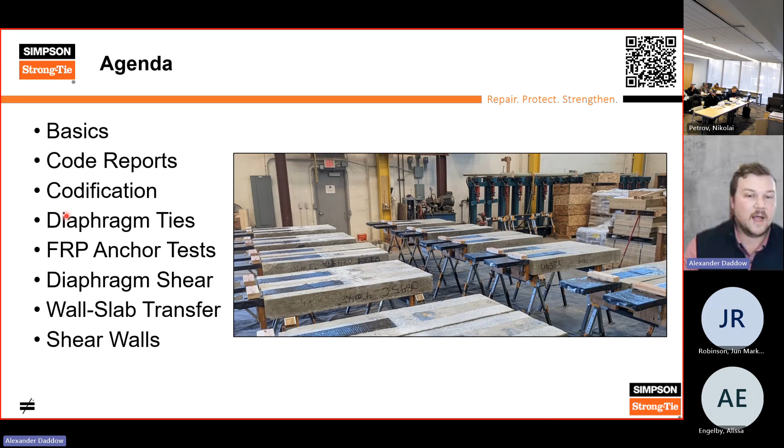Okay, no, that's good to know. I'll try and hit the button a little bit early. But yeah, today we're going to do a little bit of basics, importance of code reports, where we are with FRP, getting into the code, and then really dive into testing and applications after that.

So I like to start very, very basic. What is FRP? Because it's an acronym and some people don't even know the acronym. FR is your fiber reinforcement, and for buildings that's either e-glass or carbon, which provides the strength and stiffness to the system. And then P is your polymer resin, which is almost always epoxy for buildings, and that makes the fibers composite with whatever substrate you're applying it to, providing shear transfer and load transfer and making this externally bonded reinforcement system function correctly.

So I'm only going to talk about FRP today. I do work with another system, FRCM, which is a carbon fiber grid and cementitious matrix. It has very similar applications to FRP, but it goes onto rough surfaces a lot easier than FRP. Basically what I generally tell people is if it's concrete, block or brick and it needs additional strength or repair, you can call me and I'll help you through the whole process. We do a little bit of work on large members of wood, like glulam beams and mass timber, where FRP can help. It's just less common, so I don't talk about it too much. But that's the basics on FRP, at least on a very granular level.

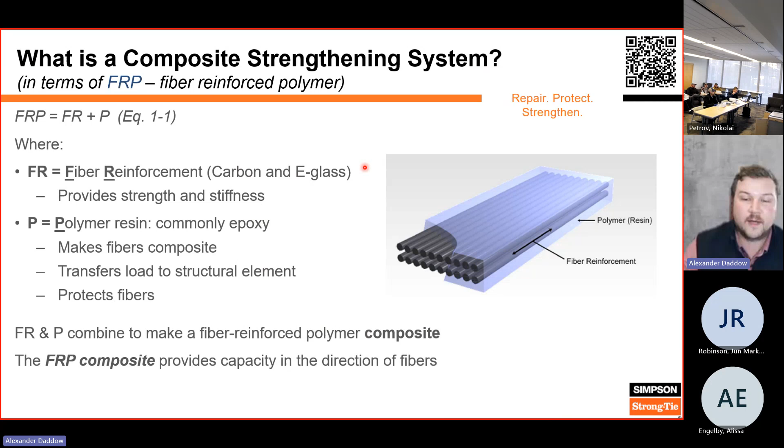Similar if you have shear, we're going to apply the FRP in what we'd call a U-wrap, essentially going down one side of the beam, around the bottom, and back up. So very similar to a stirrup. If that stirrup needed 135-degree bar bends, we would use an FRP anchor, drill that into the substrate, and

that'll anchor it off and be very similar performance. And if we needed to make a closed tie and your slab was actually in the way, we would use an FRP through anchor again to drill up through the slab and close that loop. That way we can get closed ties. So that's for the beam.

We can do similar things for slabs. Slabs, we generally only address flexural loads. Shear for slabs is not well studied yet, so I don't recommend it with FRP at this time.

And then for columns, at least for the gravity case, one of the most common applications of FRP entirely is a confining wrap, which is what we're seeing here, where we wrap horizontally all the way around, just like your closed ties. And we're picking up that actual cover area, so you get a little bit of benefit from just having more effective concrete, and then the FRP itself is confining the concrete to bring its compressive strength up.

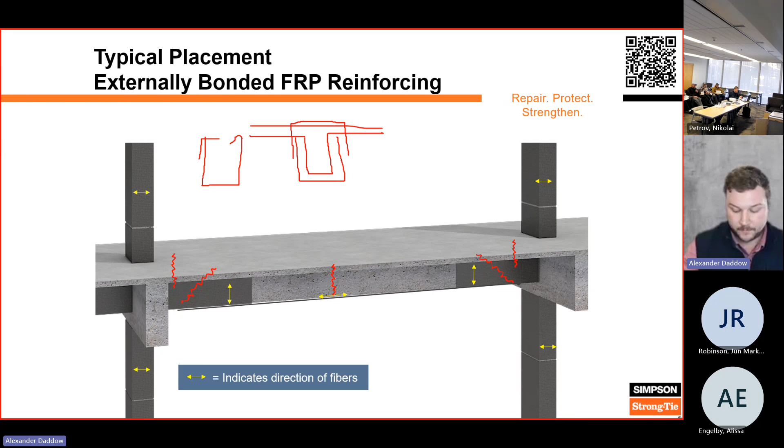How does FRP get through things? I kind of buried the lead a little bit, but we use FRP anchors to basically close that tie, and it is tension-only reinforcement. So when we have a through anchor like this one here, we're basically grabbing this strip of fabric in its parallel direction and transferring that tension through the element. So we're not depending on a through-type anchor, just tying things together.

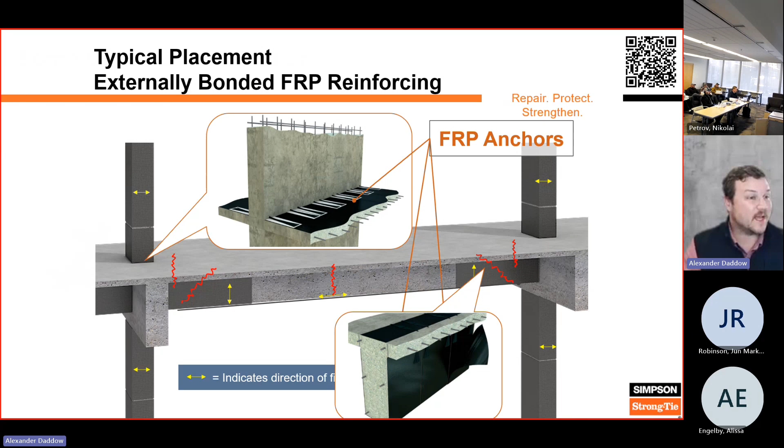Some more common applications, and these kind of work more into the lateral world. New slab openings, that happens on new construction. For new construction, we put it in the construction remediation category, where somebody made a coordination error, and now we need to open up a hole where we didn't plan it, and FRP can just approximate the rebar that was cut in that hole, and we can redistribute the loads around the opening. For the lateral case, you can do this kind of trim bar configuration to help with force transfer around the opening.

We covered column confinement, but column shear looks just the same. It's going to be horizontal wraps, and there are aspect ratio requirements, all that I can help you with to check to see if your column will work. But yeah, for columns, we can do shear reinforcement, confinement reinforcement, and flexural reinforcement.

And then walls, we're going to talk about quite a bit today. This graphic is actually showing what I would call out-of-plane reinforcement, where we have distributed vertical strips along the length, in this case, and that will pull back and forth. It is only tension reinforcement, so you're going to have to put it on both faces.

If you have an unreinforced wall, we can actually saw cut into that wall towards the center line and add a pre-cured bar of FRP and get away with a single-sided application. But that actually comes up quite a bit. I would say the majority of my FRP projects up in Alaska have been column confinement and wall out-of-plane reinforcement.

For in-plane reinforcement, you'll see distributed horizontal strips, just like you would with steel bars. And then if you have in-plane flexural reinforcement needs, we're going to have discrete strips on the ends of walls, kind of like boundary elements, taking that tension-compression out. So these are common

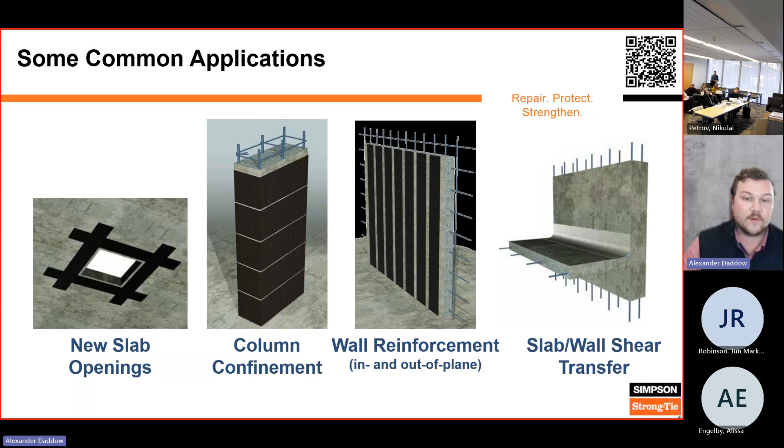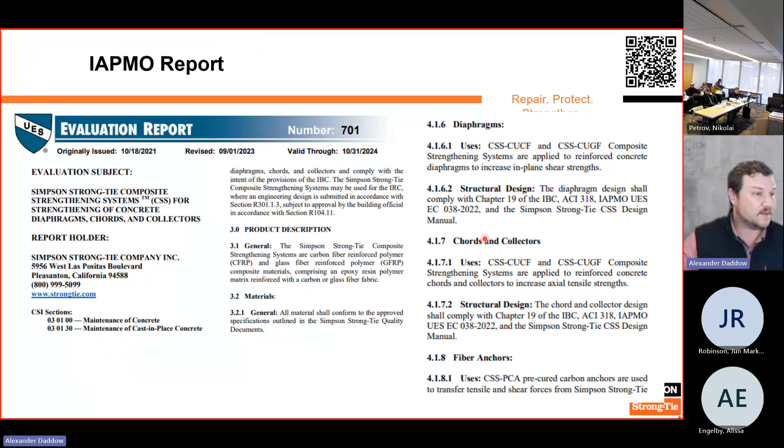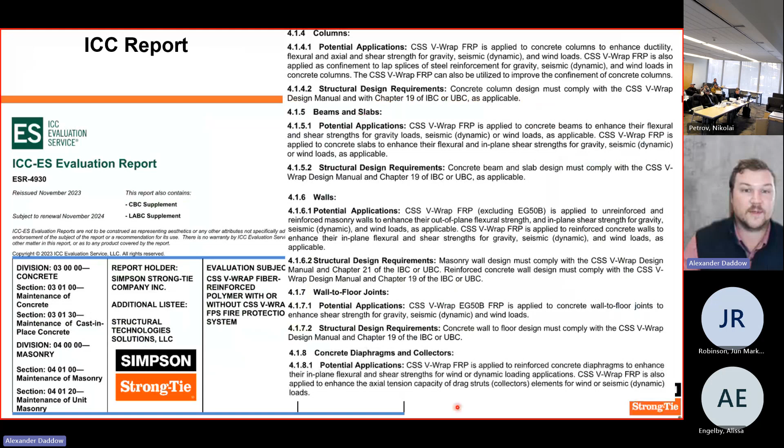Now we're going to talk code reports. IAPMO and ICC both have different acceptance criteria for FRP. Depending on your jurisdiction, and generally as an engineer, it's good to have a code report for the system you're using. It's important to note, when looking through these code reports, go into the approved applications, because there's lots of durability testing, and these reports are founded on quality testing and reviewed by the code agencies. So if that application isn't listed, there's probably a good reason it's not in that report, and you probably shouldn't use that material for it. That's IAPMO. ICC looks very similar, but if you go into our reports, you'll see we have pretty much a full seismic rehab approved at this point, from diaphragms to diaphragm-to-wall connections, wall reinforcement, and a lot of things in between. Good to have a code report to support the system you're going to be using.

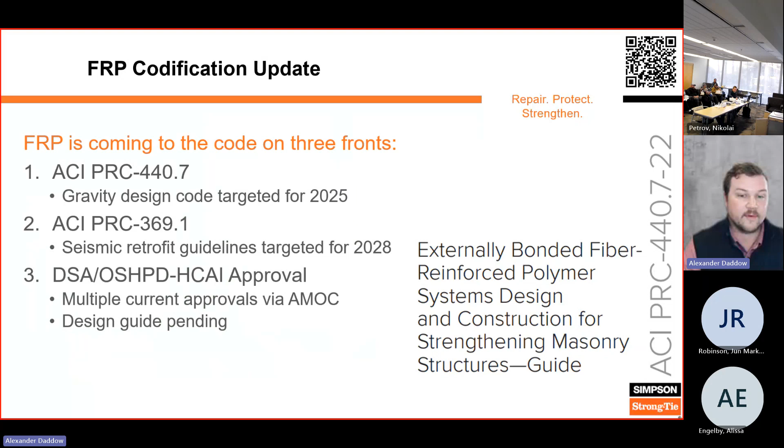This slide is just a quick update on where FRP is with the code. ACI decided to add PRC in front of anything that's a design guide and not officially a code yet. So ACI PRC 440.7 is the masonry code, and PRC 440.2 is the concrete. They're targeting having it actually in the code by 2025, which means adoption will be years later, but that'll be the first time ACI lists an actual FRP code. They're also trying to work seismic retrofit guidelines for FRP into ACI 369, targeted for 2028. Probably the one that'll come out soonest is more of a California thing. DSA is the Division of the State Architect, and OSHPD HCAI is the hospital jurisdiction down in California. We have design guides, and our competitors have design guides, into both of those agencies for review. As soon as they give approval, that'll be the first code agency that has listed how you design FRP. So that's just a quick update on where we're at.

Most of our testing has been triggered by OSHPD HCAI for hospitals in California. We hired Degenkolb to give us more information on available inventory of buildings, so we can target our tests to cover as many buildings as possible. We also use Structural Focus services for that. And then we hire Degenkolb for back-end analysis when we need backbone curves and modeling parameters for ASCE 41.

Okay, so now we're going to talk diaphragm shear strengthening. A big note that triggered this testing is ACI 440 doesn't actually cover diaphragm strengthening at all. ACI 440 has provisions for calculating axial tension capacity of FRP ties, which is kind of the first foray into diaphragm design. You can take that tension tie and compare it to in-plane reinforcement chords and collectors. So 440 has that, so does the CNR, which is the Italian code, and then the FIB bulletin is the European code. We're going to see a slide in about two slides from now that compares results from each of them. But when we got into the databases of FRP tests available, we kind of realized what I alluded to earlier: a lot of the testing out there was done with like 11-ounce, one layer of FRP.

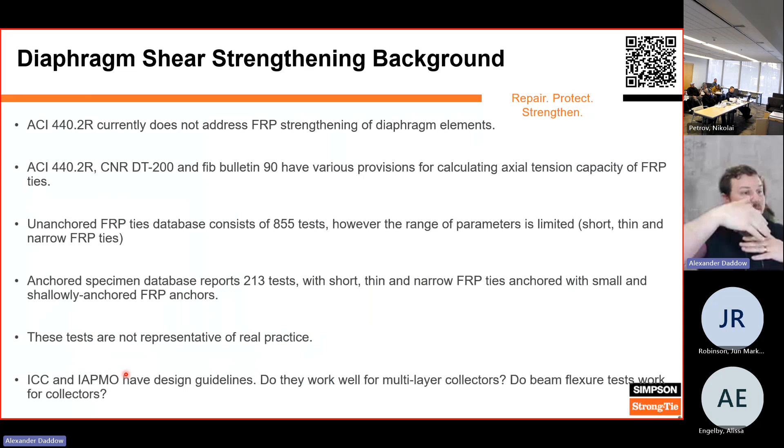The last one is ICC and IAPMO have different design guidelines. When you dig into them, they use different equations for calculating FRP debonding, which is the most common failure. At a certain point, you get so much tension in your FRP and it's stretching, and the concrete can't stretch as far, and then it just kind of peels off and unzips itself. We'll see some slides of that as well. So those are the reasons we wanted to study diaphragm shear strengthening.

Here's the 2 different equations I alluded to. IAPMO's on the left, and ICC is on the right, but essentially this is your debonding strain. Your debonding strain is kind of built into this equation here, but the basis of those equations is different, and they actually set different limits. ICC just pushed the maximum strain achievable or allowed to be used with FRP up to 0.5%. IAPMO still has it at 0.4%.

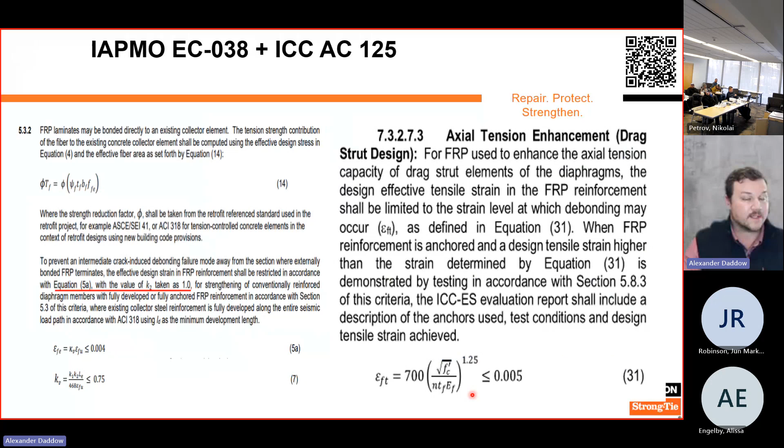And our testing actually shows that it's nearly impossible to reach those values unless you really anchor your FRP off adequately. So there's about a 25% disparity in capacities, and those capacities are hard to achieve unless you detail it. And none of the design guides currently require that FRP is detailed. Essentially, ACI 440, if you wanted to compare it to 318, is at the point where it can tell you need a number 5, but it doesn't tell you that number 5 needs to be bent at the end and tied at 16 inches on center. And that's what all of our testing is getting us to, is how to actually detail this so you get that performance in your seismic event, not just for that first big lunge from the earthquake, but post-peak performance as your building shakes apart. We want to make sure it all holds together throughout.

Hey Alex, I'm kind of ignorant with what is IAPMO?

IAPMO is... it was a code agency that focused specifically on mechanical systems at first, and then I think in the last decade - I might have to look into that a little bit deeper - but at some point they decided they're going to start running additional programs and coming into the more structural realm. So ICC has more stringent requirements to get a code report through them, at least in my opinion. But IAPMO is another code agency, very similar to ICC essentially.

Thank you. No problem. So FRP ties versus predicted values. This is the slide I was talking about, comparing the fib bulletin to ACI with real test results. The slide is actually courtesy of the University of Auckland. Professor Enrique came to our lab to run all this testing. Our lab is in Stockton, California. We have 16 active test programs outside of the Simpson Strong-Tie labs right now with various universities, and there's a lot of development in FRP right now.

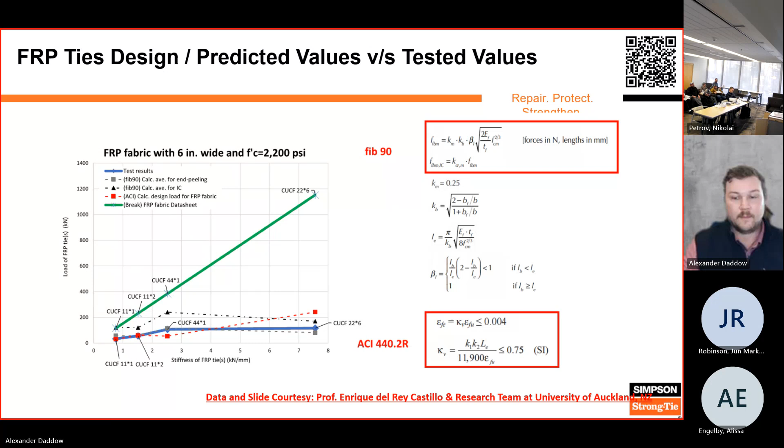All right, so this is a case study - repeat for anybody that saw me about a year and a half ago, but more testing has happened, so we're still going to talk about it. This is basically what introduced us to the hospital jurisdiction in California and kicked off this deep dive into FRP we've been doing for the last 4 or 5 years.

It's a 10-story concrete building. We're not going to talk about the shear-controlled columns - we were able to fix that with FRP - but what we're going to focus on is collectors. It's a project that was bid out entirely, and then they realized, oh man, COVID started, we need to keep more rooms open than we thought.

Is there any way to get away from steel collectors? They had steel collectors specified. Nothing really wrong with a steel collector if you got room and time, but this hospital needed to save room, and FRP takes a lot less room to install. Imagine trying to fly steel plates or beams into an active hospital—you'd have to take out the window, fly it in through the side, get it all mounted up. With FRP, we can just do it inside with about 2 feet on either side of the work area and just string it in.

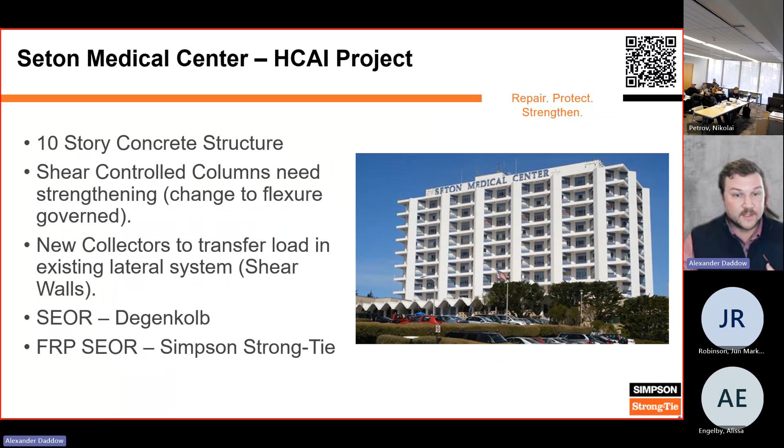That was basically what triggered everything. We designed the FRP alongside Degenkolb. We ended up being an engineer of record for the FRP design for the project, submitted it to HCAI, and their lead, Ali Sumer, said he didn't believe this would work the way we thought, because he was familiar with FRP testing out there, and he wanted to see testing with these thick layups we have in order to approve this project. So he got involved with our test program so we could make sure that anything we test will work for hospitals in California. It's really one of the most stringent code agencies I've dealt with.

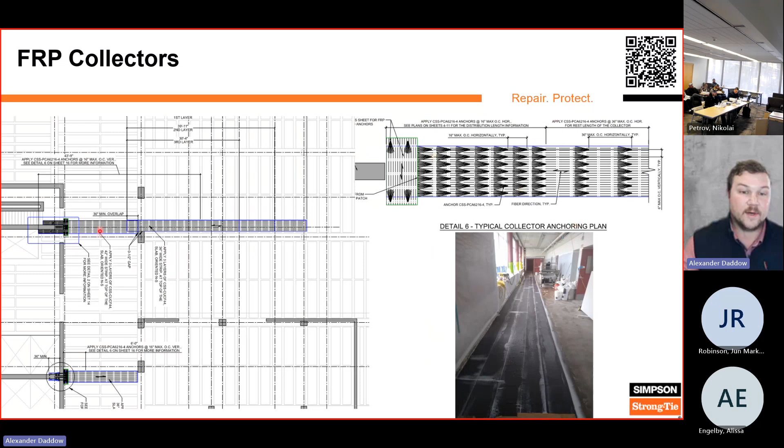We start out with a very simple test setup. It's monotonic loading—since FRP only works in tension for collectors, we didn't need to test it cyclically at that point. We do have a subsequent test program coming out of the University of Auckland where we're going to try to test these collectors cyclically to see if that changes anything. But this is essentially the state-of-the-art testing for now.

We have a full-scale 6-inch slab anchored down to the test rig, and then a 6-inch strip of FRP applied to the surface. We start to play with anchor configurations and layup thicknesses. What you see here is kind of the old school—one strip of fabric, no anchors, and we pull on it to see how it performs and where it fails. It looks a little different in actuality.

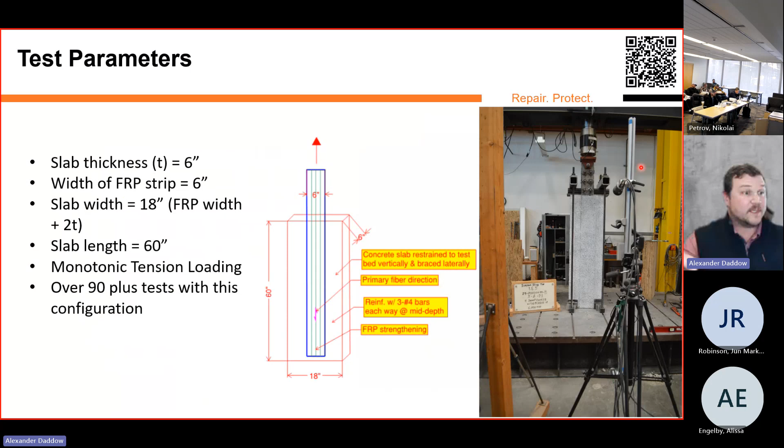This is white paint with black spray paint flecked on it, for this digital image correlation system to track the strain fields. So in the next slide, you're going to see basically the load move through the fabric as it peels off.

Here we are—I've got to get rid of my laser pointer. This is essentially how unanchored FRP performs and behaves. We're going to be pulling up right here. Then we're going to see load start to develop, and this whole field will change color. There'll be this regular purple color—that's FRP that hasn't seen any load, and anything that's changed color is either debonded or in the active bond zone. The active bond zone is the portion of FRP that is transferring load to the concrete or from the concrete into the FRP, depending on how you're looking at it.

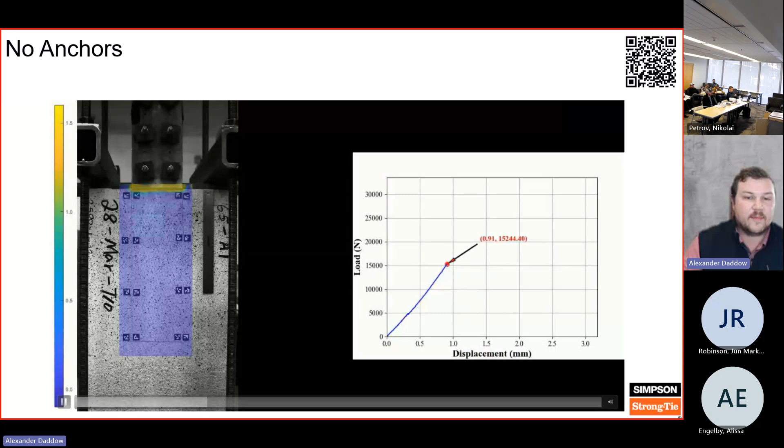We'll build load here, and at a certain point we'll hit the debonding strain, and that active bond zone is going to travel down the end of the strip. When we run out of strip, we lose all capacity on the right. Let's see that happen. And there we are—the active bond zone is now traveling down. So you can see it travel down, and then it ran out of runway and we lost all capacity.

So that is just unanchored FRP, still a pretty thin layup, but we get decent displacement—you actually get decent load in it. I get that question quite a bit: if we don't detail the FRP and keep the layering thin enough that the ACI equations are accurate, is it okay to leave it unanchored? And I say, well yes, in theory, as long as you're confident the seismic load is exactly what it's going to be, because if it goes 10% higher and you only left 5% residual capacity, you're going to lose your entire FRP system in that event.

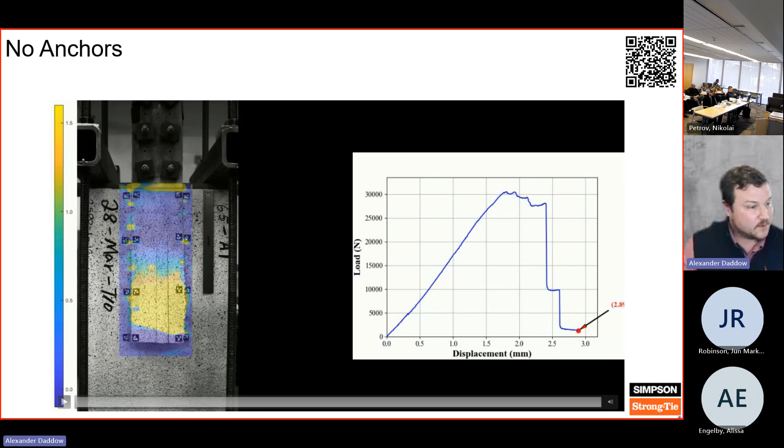So I almost always recommend anchoring it off, even for gravity cases. You're just depending on the bond too much, and it's good to have that mechanical interaction.

So the next one is IAPMO basically said, hey, if you do an anchor that's 1.5 times the capacity of your fabric, you can take that highest strain and you'll be able to achieve the highest capacity with FRP. So we wanted to see, okay, big anchor, what does that do?

So on the right is where the load's coming in. There's a head of an anchor here, and an FRP anchor is essentially, if it's an embedded anchor, it's a bundle of fibers that get drilled and epoxied in just like a normal epoxy dowel, but then it comes out and it's a loose fiber tail. And that tail gets laminated into the actual FRP fabric and it grabs the fabric that way.

So right here is what I'm going to refer to as a splay or anchor fan. That is what's actually connecting the FRP anchor to the FRP strip. And then where it comes together, that's where the embedment happens into the slab.

So this one's a little bit brighter, but the load comes in over here. And what happens is the load builds to where the FRP debonds, and then you see that active bond zone travel to the anchor fan. Once the anchor fan's activated, it starts to pick up more load.

But this anchor is so big that the only load that makes it past it is going to be on the sides of the anchor. So at a certain point, we get past the rupture strain of the FRP, and again, the system fails. So performance is better with the large anchor, and you can get that higher strain.

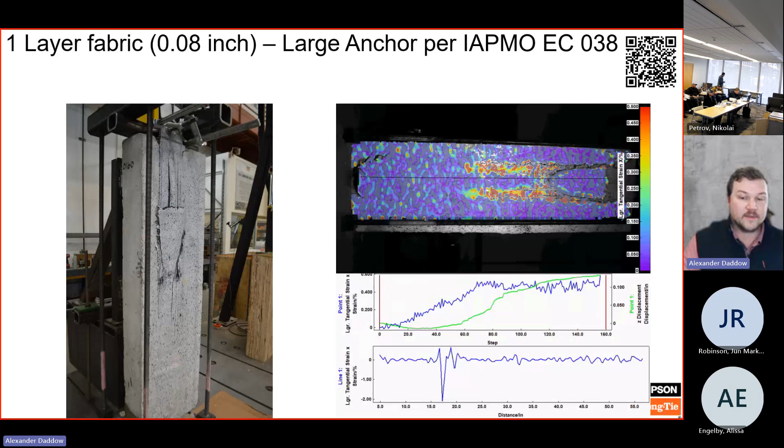Most buildings don't have a 5-foot collector in them. So this is the end anchor again, but we put it towards the end because industry standard, like what we bid against usually when other designers design FRP, is they'll take that 100-foot long collector, they'll put a big anchor at the opposite end away from the lateral force resisting system, and then basically just say we can take the high strain, and you'll see everything debonds all the way out to that anchor.

So instead of this nice even force distribution where your collector's picking up load along its entire length, you end up with a very concentrated force out at the end, about 100 feet away from your actual lateral force resisting element. So I don't like that as well, but you do get that higher strain promise. So it is accurate - if you anchor this off, you can get to the higher strain.

So there, and I'll start this over, get my laser pointer. Right here is your active bond zone moving down. So everything up here is debonded, everything down here is still bonded. And when you hit the anchor, you do start picking up more load, but eventually this anchor is sized for fabric rupture. So the fabric's going to rupture, and that's when we lose the capacity.

And this is all slowed down quite a bit. So that debonding actually happens in like a split second. And then when these things rupture, they go off like a guitar string and stuff flies everywhere.

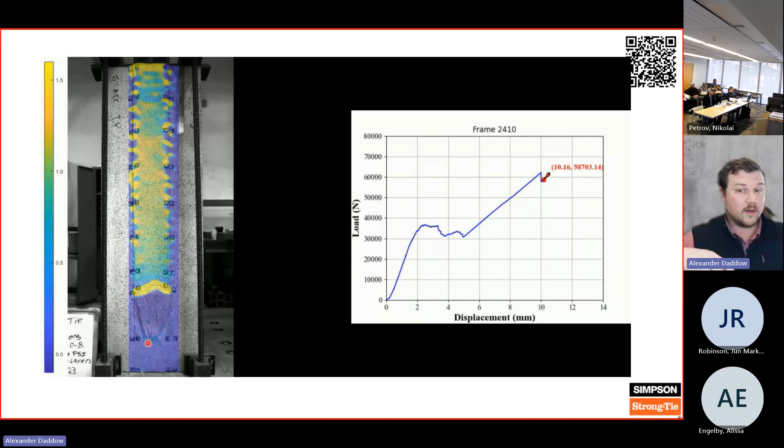Sometimes people ask me about this little step, so I'll go back when I talk about it. But that is essentially due to practical reasons of the installation of that FRP anchor down here. You can imagine you have a bundle of fibers, it's got to come up and take a hard 90. So anything on the outside edge of that curve is going a longer length than anything on the inside. And when these anchors come into load, that usually ends up with a little end peel of the anchor itself, which you can see as a kind of yellow halo that forms around that anchor right when it pops.

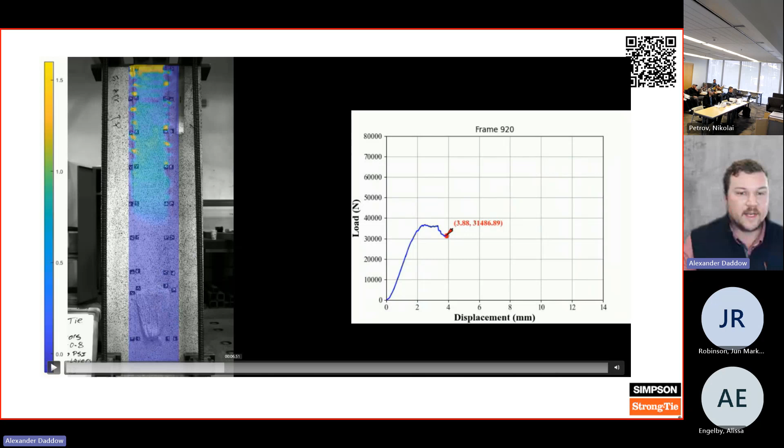So right before the step, or right when it steps - so when this jumps down, this will all turn yellow. And that's just the end of the anchor peeling up as those fibers all pick up the load.

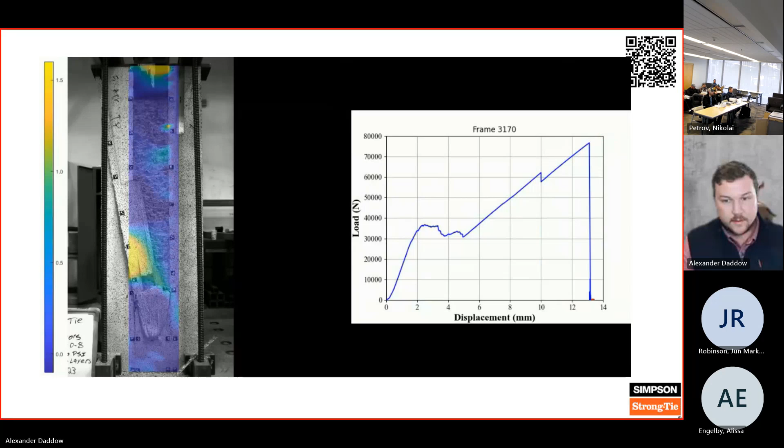So again, we liked that the end anchor could get that higher capacity, but we didn't think it was a good detail specifically for a seismic case because you end up with that huge stress concentration very far away from where you're trying to get it, and the cracks could go wherever they want.

So this is the test that we ran with smaller anchors. The anchor head is here, the fan goes up, load's coming in from the top again, and then there's another one here with the head right here.

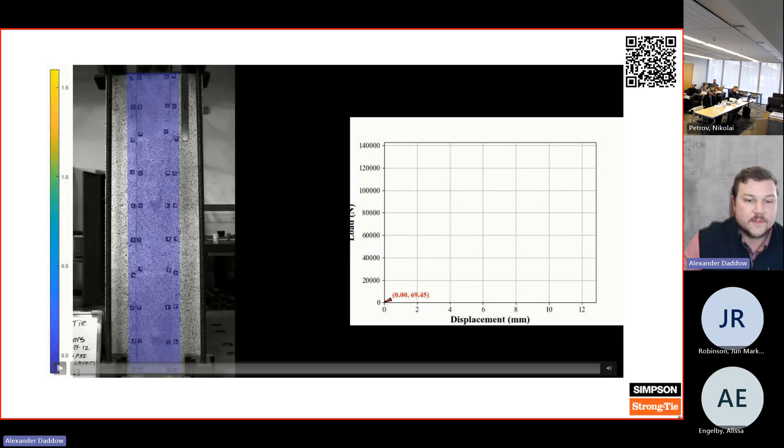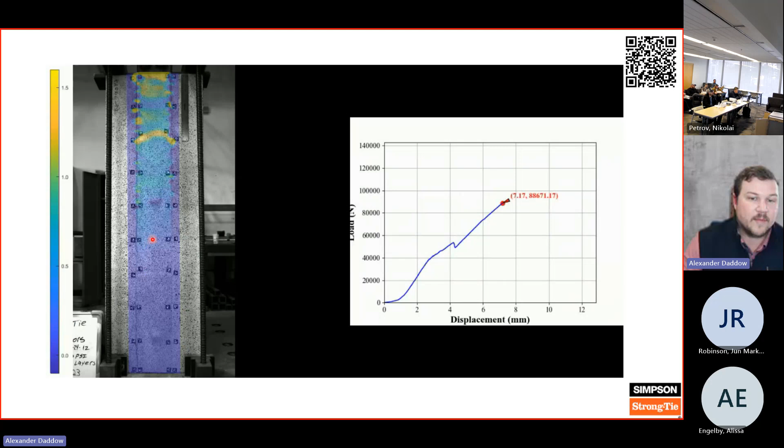So this one, again, we get a nice active bond zone and we get debonding, and then we hit the anchor and we start picking up more load, but the anchor is small enough that all the load can make it past it. And then we hit the second anchor, continue to pick up load and capacity, and then eventually we get to the point where we fail the actual anchors.

FRP only works in tension, but this looks a lot like a shear failure where it just shears off right at the top, and we'll see that in a second.

But what we really like about this is we can still do the big end anchor, but we can put these little distributed anchors along the length that allow load sharing. And as the system debonds, those anchors will bring load back into the FRP or back into the structure, whichever direction we're heading, even if it is debonded.

And we've actually run these tests again with cellophane between the FRP and the concrete, with only the anchors in place, and you get the exact same curve. There's a little bit more area under it usually due to the debonding. So we would never install it without doing surface prep and working on that bond. But we know if we lose the bond, we're still going to get the performance that we want.

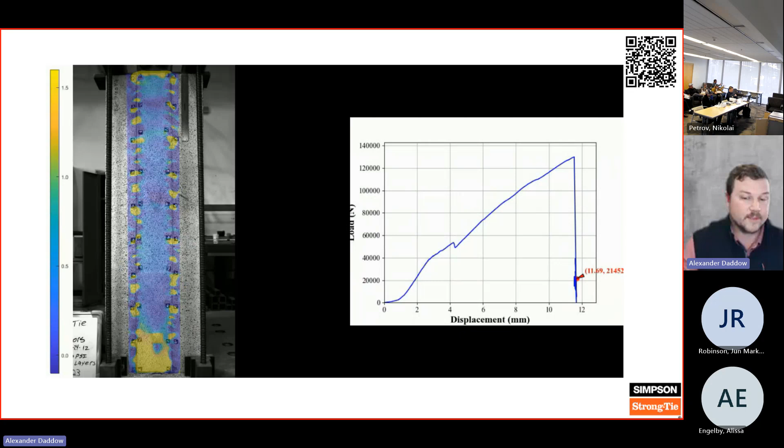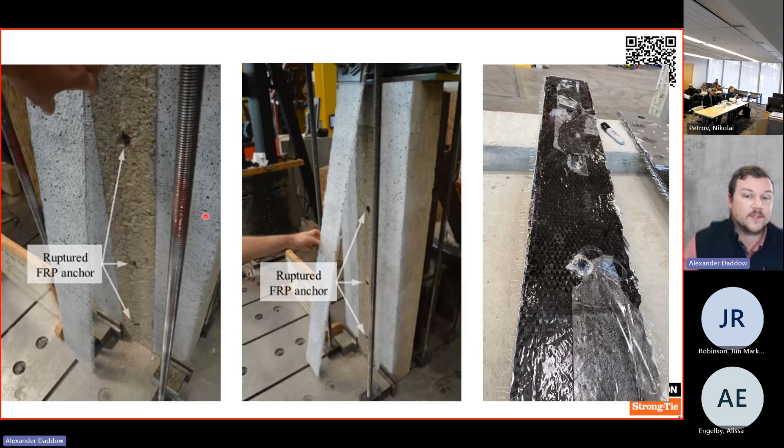So unbonded FRP, if properly detailed, we can get to the capacity we need. And then you just need to understand how your anchors work in order to determine their pattern and diameter.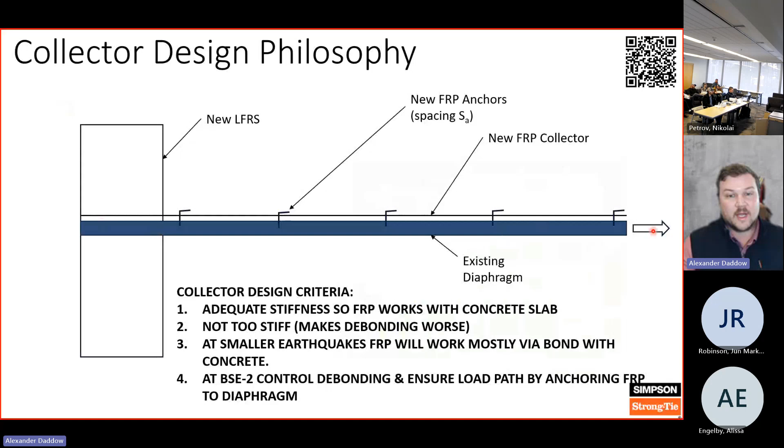So this is kind of the collector design philosophy. We start with a bonded system and we anchor it off. Load comes from the building into the lateral force resisting system. As the load builds, we'll start to develop cracks.

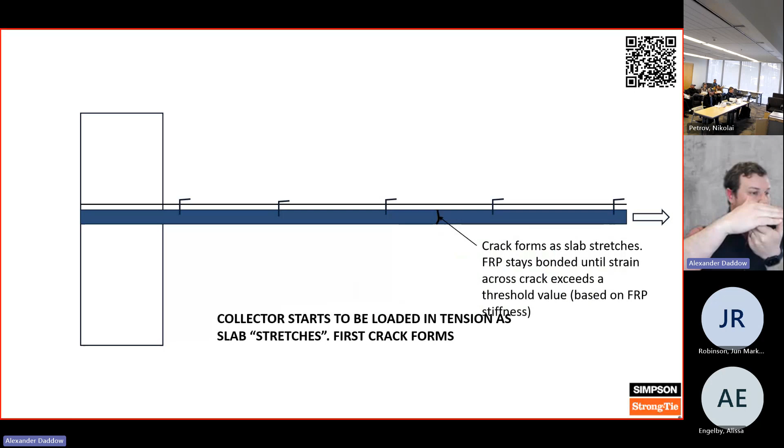Cracks are essentially a place where FRP is debonded. If you imagine that crack opens, FRP is above it. There's nothing below the FRP, at least for the width of the crack. And debonding typically will propagate from a crack because that's where the stress concentrations form. And once you're over the limit, it just unzips.

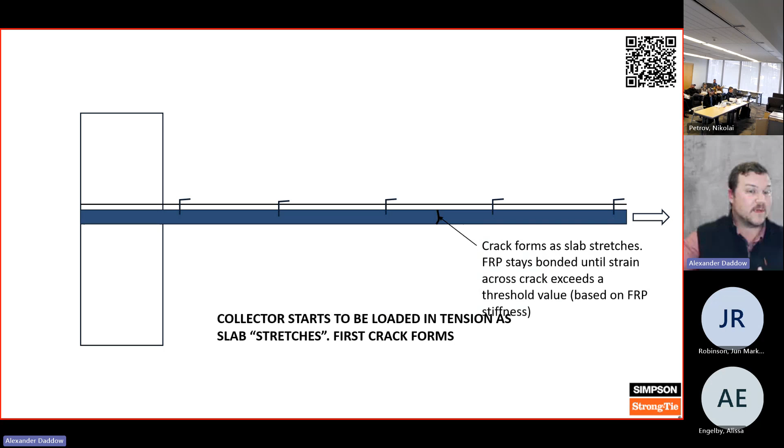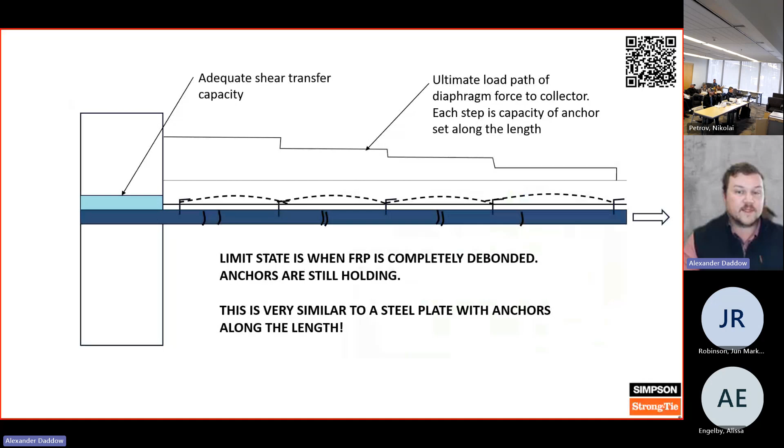So as the cracks form, the load gets higher. You'll start to see some of the FRP debond, but we have the anchors in place to keep it performing. And you go into that highest load cycle. And as long as you've detailed it out correctly, you can get that load into your lateral force resisting element and get the performance you're looking for.

So we started with just the fabric. All that testing set us up with what these anchor patterns need to be. So that distribution of anchors and diameter affects the strain that we can calculate. And then we use the strain to figure out strain against the desired capacity to figure out the area and thickness, or width and thickness.

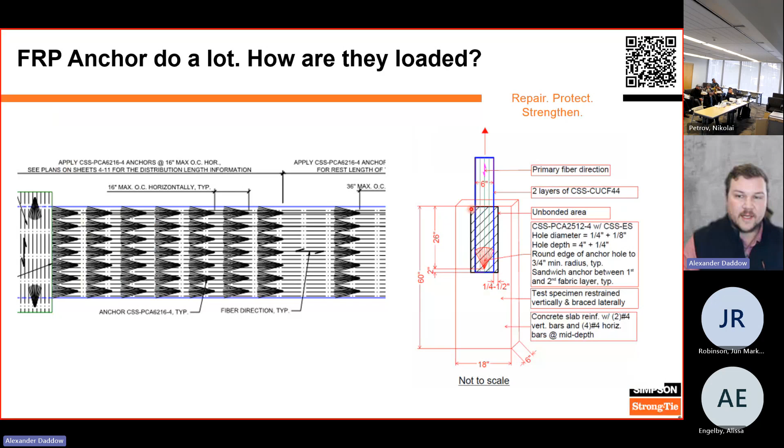So all of that testing gets us to the point where we know where these anchors need to be, how wide this strip is going to be, but it doesn't actually tell us if those anchors have a high enough capacity. So we went back through and again tested just one anchor in various configurations.

We had embedments at 90 degrees, 135 degrees. We've done normal weight concrete, lightweight concrete. We've even done a little bit on steel pan decks. And you install the FRP unbonded, so that's the hatch, and then you pull on it in the same configuration until you get that anchor to fail.

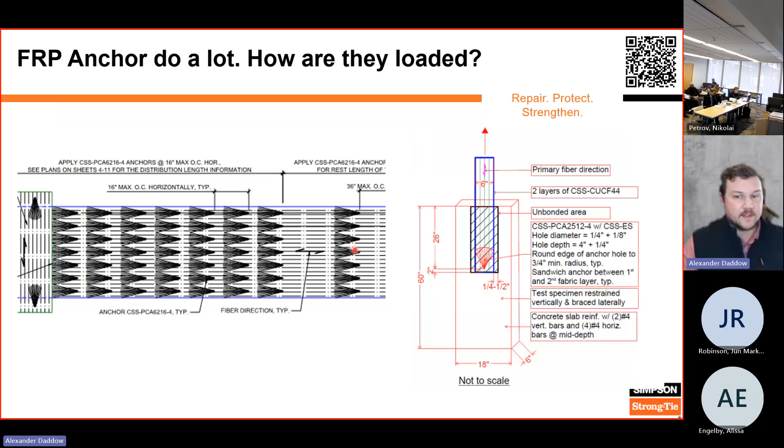We study that to the point where we understand what diameter and embedment give us what capacity, and then that helps us set how many anchors and what diameter and embedment in this heavily loaded section. So the lateral force resisting element will be over here. And then as we get further and further out with lower loads, lower strains, we start to trim that down to pick up economy.

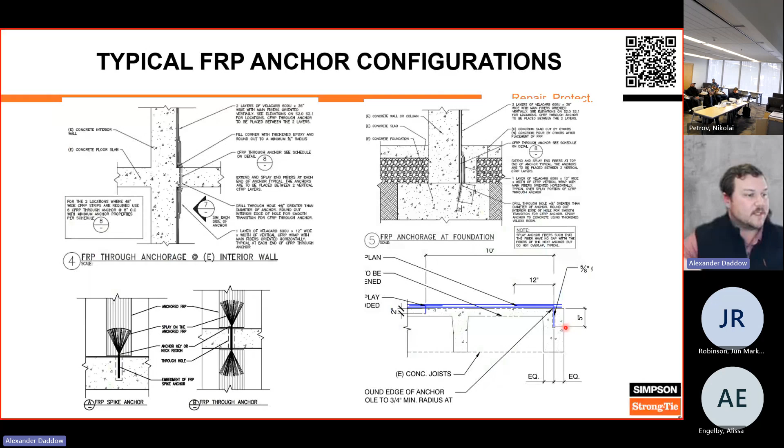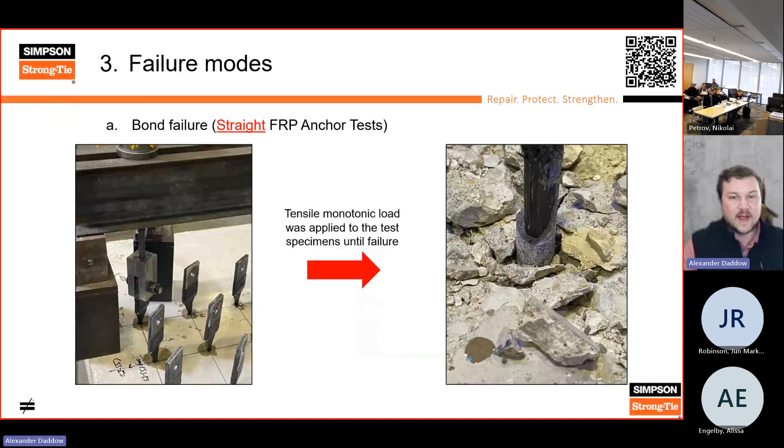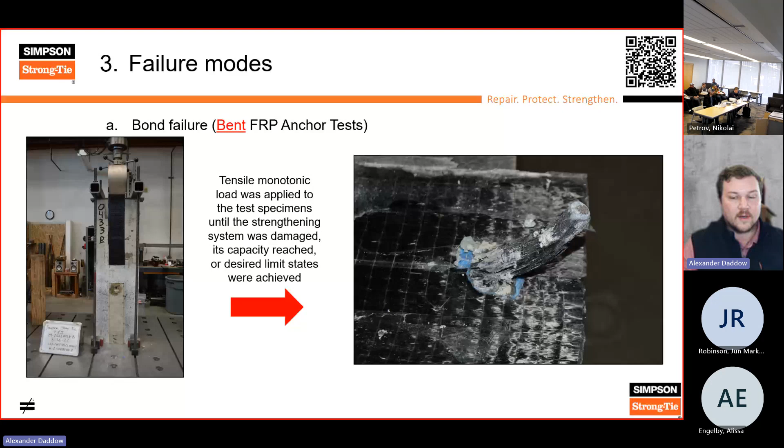Here's a bit on how FRP anchors can fail. This is all the information we studied to figure out the anchor diameter, but essentially they can fail in straight bond failure, just pulling out. You can have a combination like a 90-degree pull out, where they're actually unthreading from that hole even though you're pulling against them. So it doesn't fail in shear, it still fails in pull out, even though the load's 90 degrees to the anchor. You can also have a rupture failure where we exceed the capacity of the fabric itself.

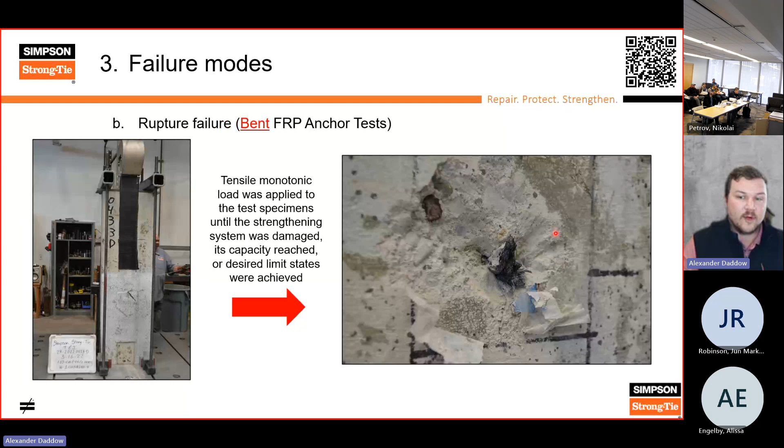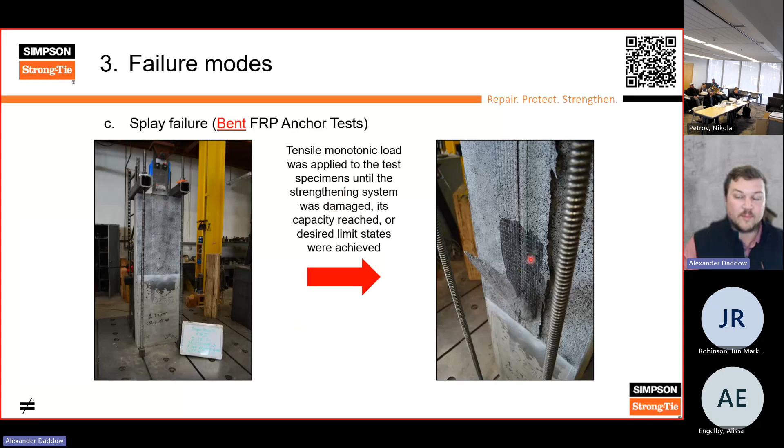There's also rupture failure in a bent anchor, the one I was referring to earlier that looks more like a shear failure. And we can have splay failure, where we've exceeded the bond capacity of the anchor splay to the fabric itself. This one's actually really hard to produce - the bond's really good, so we had to be very specific with this layup to get it to even happen. Not usually a failure mode that will govern.

Oh, would you look at that? Something happened to my presentation.

That was it for collectors. Now we're going to look at diaphragms. That's what this edit master title should say, FRP diaphragms.

I include this image because it's an older project we did on lightweight concrete in Oregon in the winter. The tent is there to keep the rain off, which is definitely a problem we've faced up in Alaska. This little tube is actually pumping heat into the tent because it's too cold for the epoxy to cure. We did that on the YMCA building in Anchorage - they built a big visqueen tent with positive pressure to pump heat in and get an installation done, I think it was mid-January, up in Anchorage, which is very difficult. Under 40 degrees, epoxy does not cure at all, so you've got to get everything up to temperature and get it all installed.

That's the main reason I keep this in. Also, this is an installation that occurred prior to all the testing I just showed you, so there are no anchors in this design. If I ever get a call about this building again, we will make sure those anchors get added for sure.

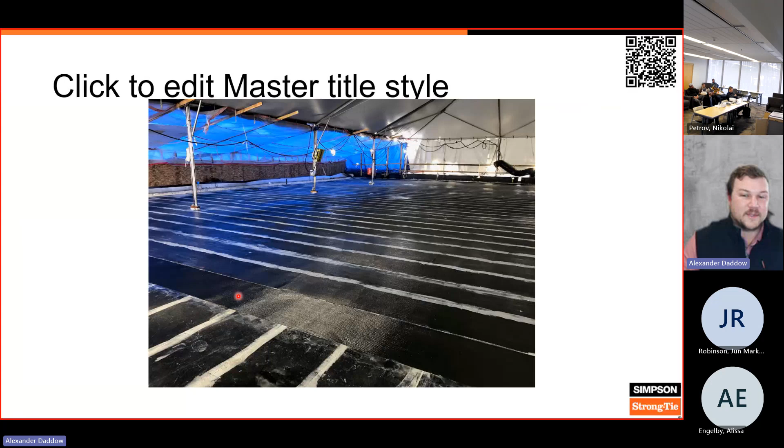All right, so diaphragm testing. We've got 14 minutes left, I think we'll make it through diaphragms and we'll have to save walls. This is our first diaphragm test that we did as a study, to start building more university-based testing that'll be more in depth.

This is a Simpson-only internal test. On the left is the control, but we wanted a shear-controlled slab, so we're actually going to load it midway here. These two bond beams are fixed, and then we'll push it to where you get that 45-degree crack from the load point. That's why you see very low shear reinforcement and higher flexural reinforcement - we want to get that shear failure.

So we tested that without FRP, then built a similar specimen and put FRP on it, using the industry standard where we're adhering the strip and putting the large anchor on each end. Now to compare that to my collector... metaphor or simile, whatever it is, this looks great on a 5-foot specimen. But if that diaphragm is 100 feet wide and you only have the end anchors, I'm a little more concerned, because you'll often get cracks near the edge of your slab, and if you lose that anchor, you lose the whole system.

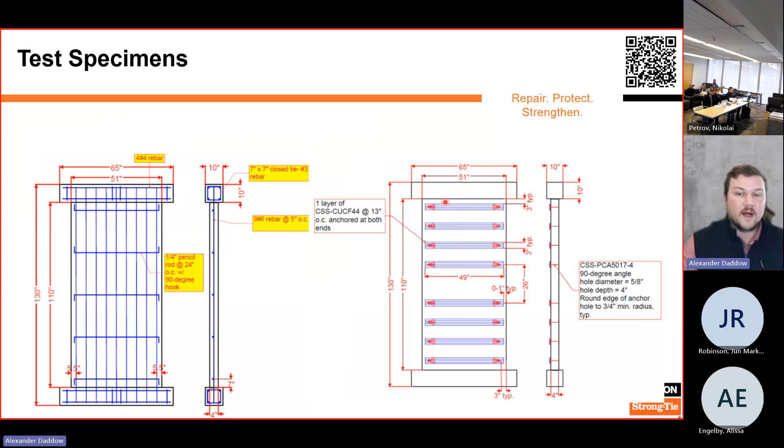So even on diaphragms, even though we've tested it this way, I'll show you how we get to a more distributed layout for our recommended detailing. But here's the load setup, again fixed, and then we have these two big rams pulling on it with steel plates to distribute the load.

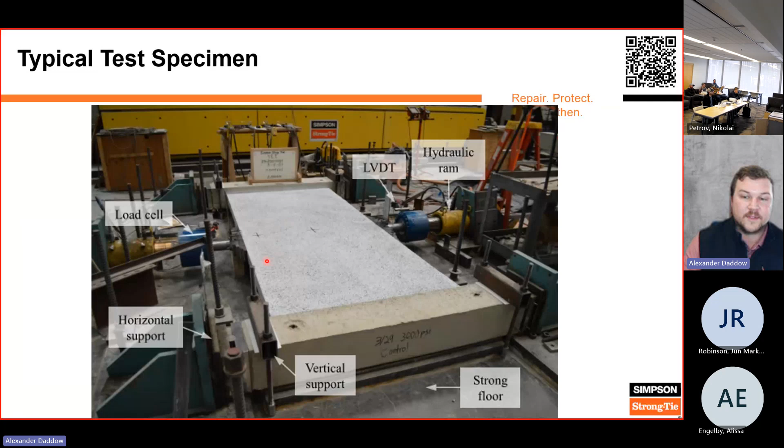You'll see when we get to the FRP specimen, it's too strong, to the point where we get a crushing failure and this whole thing kind of explodes, and we never fail the FRP. But the control specimen, here's your hysteresis, fails just like you would expect, shear controlled, you get that nice 45-degree diagonal between your last point of support and your point of loading. Not a lot of area under the curve, but we know it's predictable. Predictable enough, at least where we don't get that crushing failure.

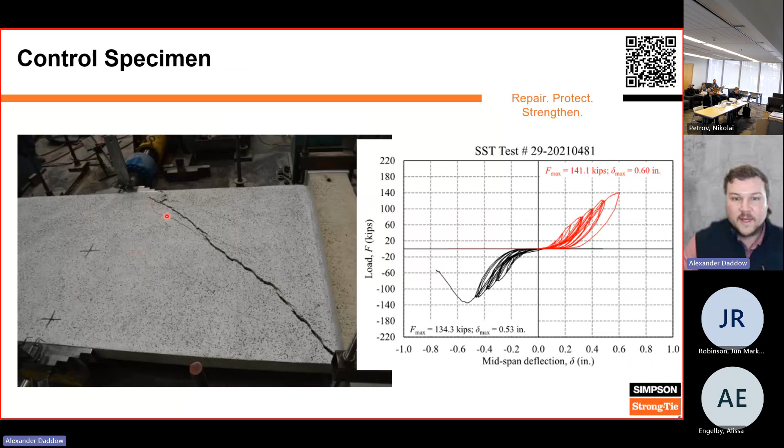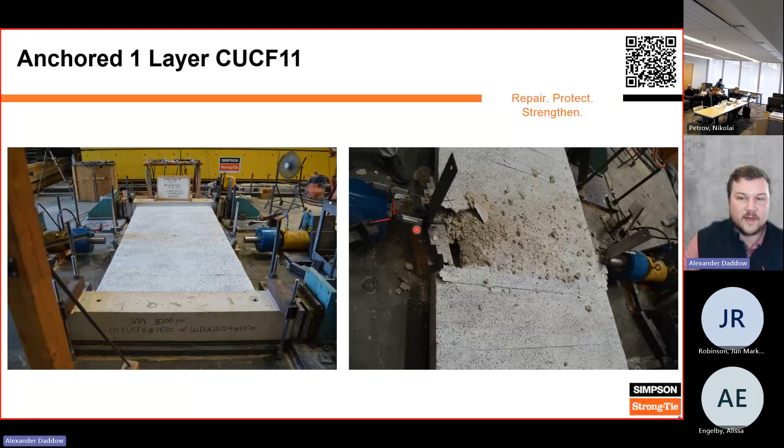And then we go to the actual strengthened specimen with FRP. Again, it's painted white so it's going to be hard to see, but there's strips along it. And we made it too strong, and we get this big crushing failure.

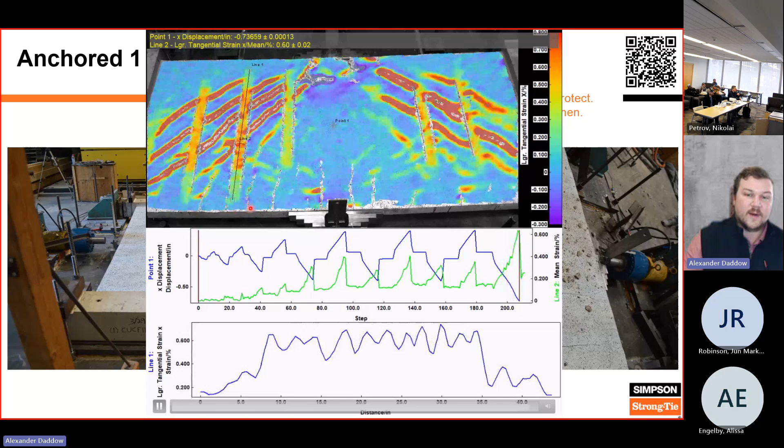And this right here is what kind of alludes to my big worry. This crack, if it was to propagate to where that anchor is, we lose this, and then you get your typical unreinforced failure. Didn't happen on this one, but I wish I had a video of it happening because it would be a lot more helpful.

But essentially, I like the end anchors, I think it's great, you get the higher capacity. You definitely want your end anchors sized for rupture. But I would like to see multiple rows in case a crack hits it, and then distributed anchors, because if this was a 100-foot long diaphragm, we're not actually touching anything out in the middle, and it's much better engineering-wise to distribute that and make sure everything's working together, pull as much ductility out of the concrete as possible.

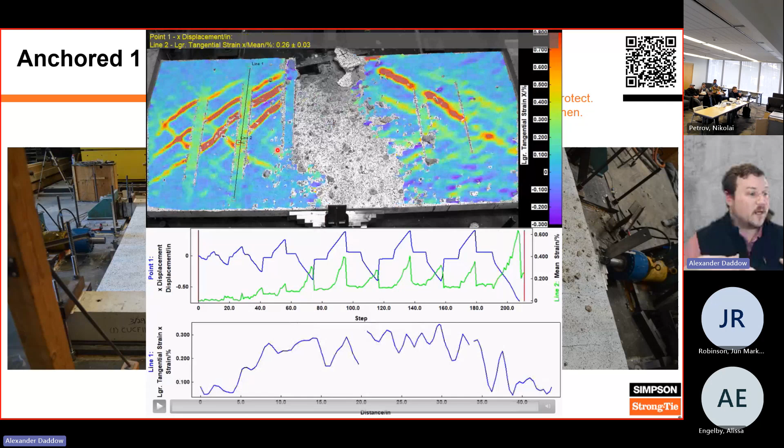So this is the university study that we went into after that, and this is an industry study that multiple manufacturers are involved with.

Was that a cough or a question? That was a cough. Okay, gotcha. No problem. Oh my, so many things ruined.

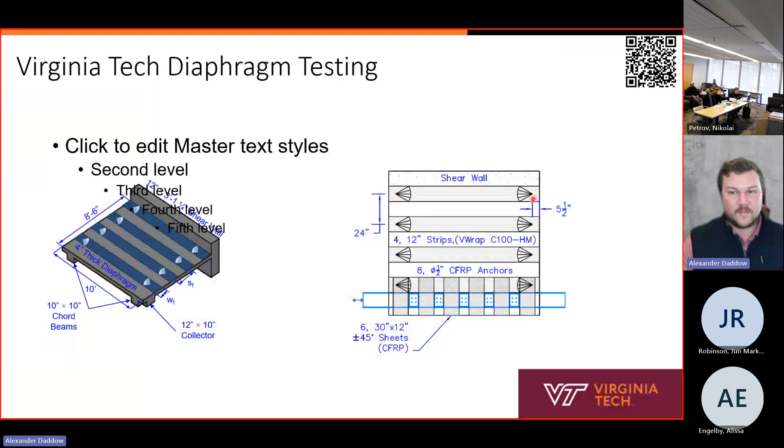But here's the test setup. So there's actually a wall that's fixed, and then essentially a concrete collector beam here that's going to actuate back and forth. Again, industry standard type testing, we put end anchors on this specimen. It's roughly a 10-foot by 10-foot specimen. This is what it looks like when it's modeled, but basically two specimens, you set the ram over here, you break this one, then you move the ram over, break it again, and that way we can replace and cycle through and get this testing done as quick as we can.

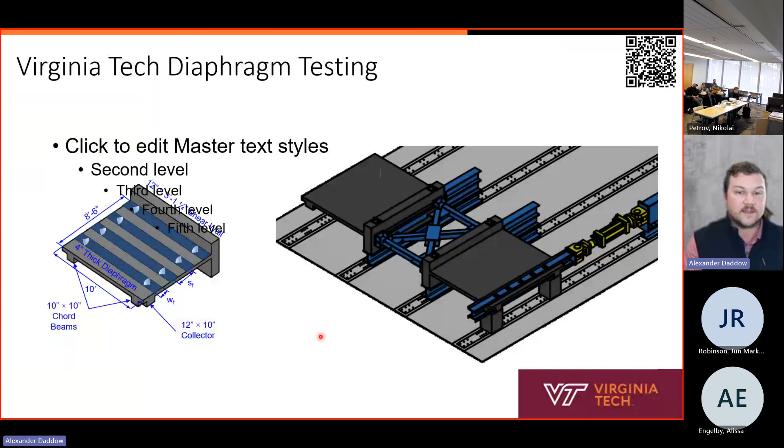So specimen CD7, we're moving more towards that recommended detailing that I like to push on everybody. Instead of just one big end anchor, we have two rows of smaller anchors that are sized to rupture this fabric. And we're sticking with the same module, 10-foot by 10-foot. Then we're comparing it to a completely unanchored FRP system, because we already know what the one end anchor does, but we really want to see how bad some of the old projects are and how big the need is to come in and fix those.

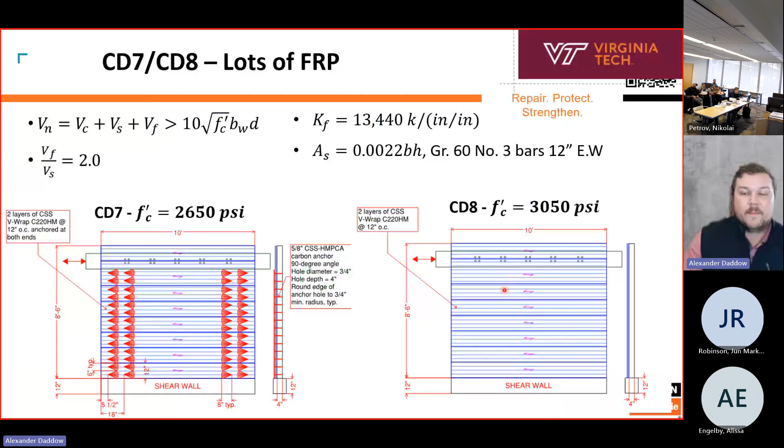So a little bit more like watching paint on these ones, and I'll fast forward some. We're going to see out here, we're going to start to move back and forth, and I got to get rid of my laser pointer again. As it cycles, you're going to see on the right, the students at Virginia Tech come in and start to outline any debonded zones. What you'll notice is there'll be a few lines at first - right now is when it's starting. And then very quickly that whole inside debonds, and you'll actually see it on the left undulate and move around. So at that point, your anchors are really the only thing holding that system into performing.

But we made this thing so strong with this solution that instead of having a typical diagonal shear failure, we get to the point where we have more of a sliding shear failure at the load point. And in the new ASCE 41, you get a better M factor for that.

So changing the failure mode is good because then we can help target what fails. Changing to a more favorable failure mode is great because it can reduce the overall load and the level of reinforcement needed. So this has great performance. We loved it. Still not quite the 100-foot scale I'd like to see it tested on, but there are limits to what you can test.

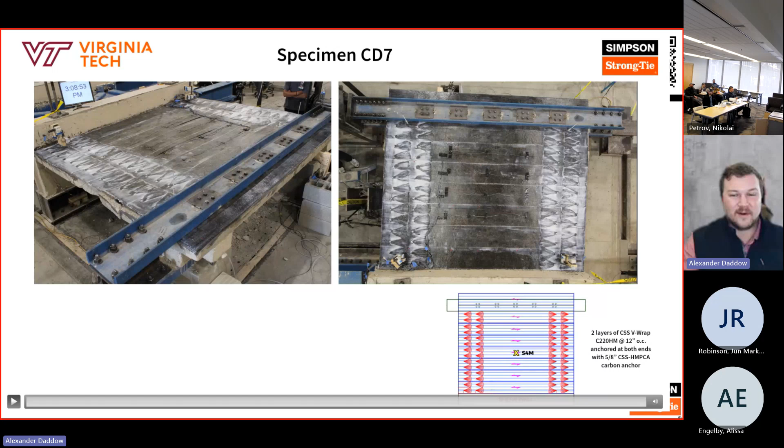And then when we compare it to the results of the unanchored test—let's see, did I have that video? I think I cut it out for brevity. On the left is our anchored specimen, and you can see we still get that diagonal shear failure, but when we go down below, the slab's pretty well held together other than where the load was coming in, and we got that sliding shear failure. So that's on the left here.

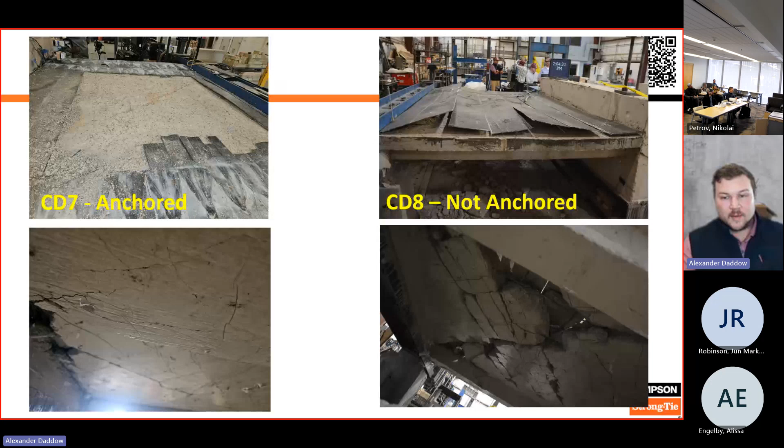But on the right, the unanchored one, it got to its debonding strain and this whole magic carpet popped off all at once, and then the concrete did everything. In direct comparison, we still have the in-plane shear failure, but what concerns me is we also have large chunks of concrete falling on occupants. So we really like the detailing on the left and the ability to kind of target where things fail and protect egress paths.

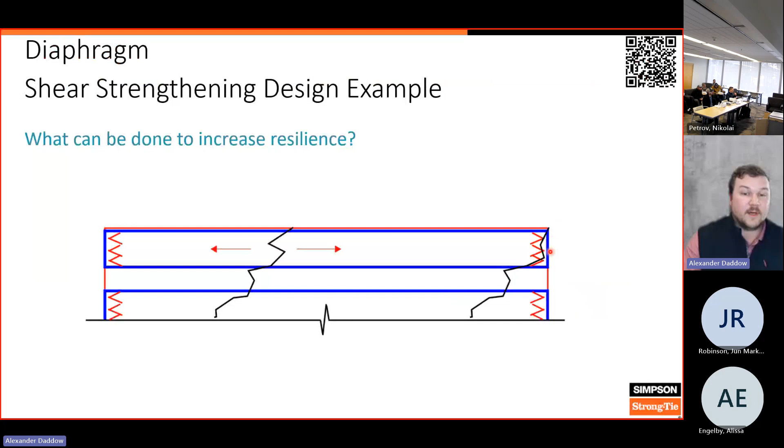But what this leads us to is: what can we do to increase resilience? Well, we know that when it comes under load, there's going to be a crack and debonding is going to propagate from that. We also know that if a crack hits our end anchors only, we're going to lose that whole system entirely. So again, we come in on a 10-foot by 10-foot module because that's what we've tested.

And we start to approximate that 10-foot by 10-foot module with those smaller anchors again. So the load can still move past them, but if we get a crack here, we lose these anchors—there's a whole row of anchors to ensure capacity. It just makes that post-peak performance a little bit more assurable, and it gets the actual performance promised by the equations up to where it should be.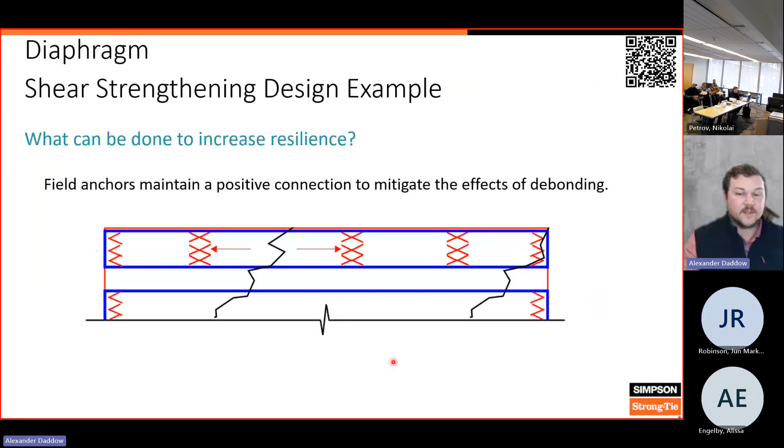So this is what it looks like in practice. The images on the left and the middle are just the two 0-90 layups that we would do to address loads in both directions with the industry standard end anchors. And then this image on the right is what we actually recommend adding on top of that for good detailing. Again, these are small pin-type anchors, embedded-type anchors, and we're just building them off of that tested roughly 10-foot by 10-foot module.

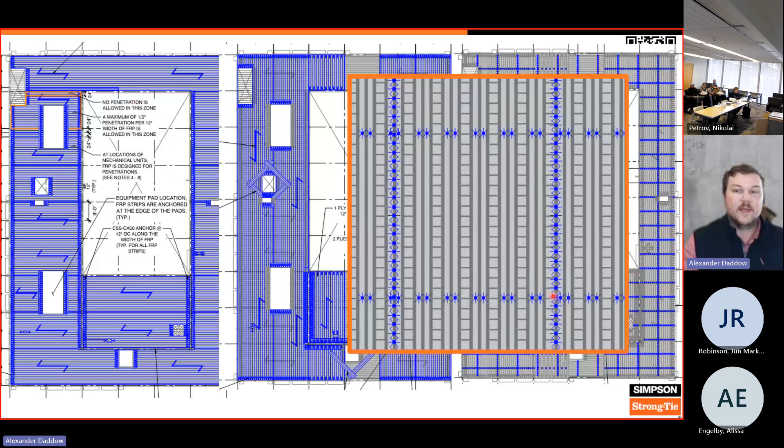So it starts being more engineering judgment for the actual spacing, but we try to build it economically based on the actual dimensions of the structure.

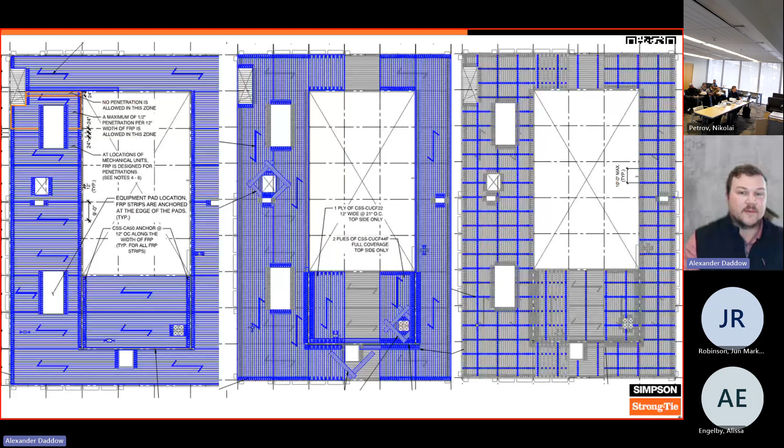So on this project, all of these smaller anchors adds a little bit of schedule time and cost. But on this project specifically, the material cost difference is only about 10%. On a big FRP project, material cost is in the realm of 50 to 60% of the installation. If you go down to a smaller scale, materials are often 10% or less, and it's mostly labor. So it kind of matters what we're looking at on what we can design for you and try to find that nice balance of performance and economy.

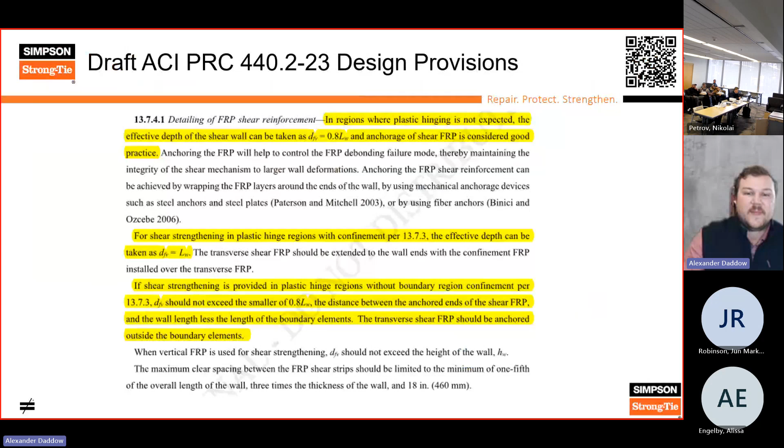All right, we only have 4 minutes, so I don't think we're going to make it through the shear wall testing. But you can kind of take a peek as I scroll through to my last slide of what we would have got to, and I'd be happy to come talk about this at any point.

Oh, I love this slide. This is the test lab in Stockton. So to break a full-scale 12-inch concrete wall—well, the full-scale 12-inch wall we did without FRP on it was over 800 kip capacity, and then you add FRP, which adds some capacity. So these are two 550 kip rams that we hooked up to this transfer beam, and they're there to break the wall.

We built this rig for the structural steel connections that Simpson offers, and then to help with the FRP as well. But I love this picture because right here, that's a full-grown person, and that just kind of gives you the idea of the scale of this sort of testing.

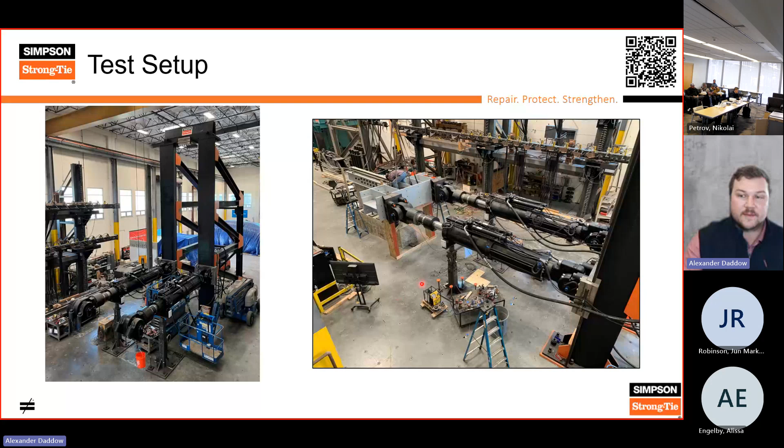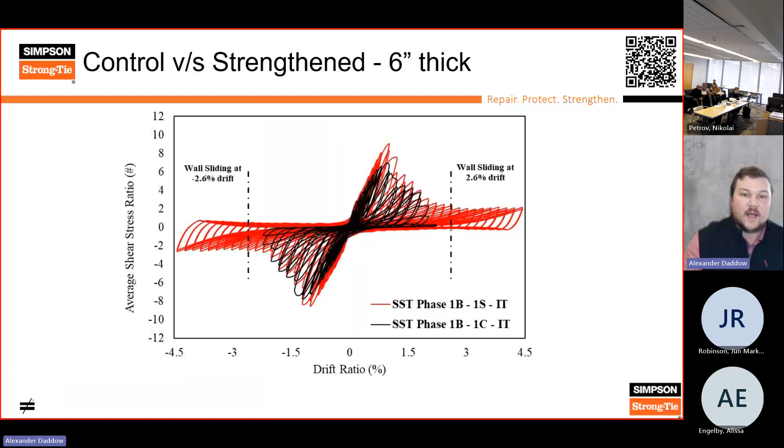And we'll keep moving. We did have good results. We actually did one 12-inch wall, two-sided with through anchors. And when we look at the hysteresis for that, we were able to get over 10 root F prime C. So that is potentially something that could pop up in the code down the line, but definitely don't want to promise it yet. I appreciate everybody coming and paying attention.

Future updates that I could come talk about: we have FRCM testing, our other composite system, and a much deeper dive into anchor testing. We're doing anchored beams for shear and flexure cyclic loading instead of just monotonic. We have a shear transfer truss made out of carbon that helps connect new concrete to old concrete. And then lots of study into various ways to fix old mechanical bar splices or inefficient or insufficient laps that a lot of old buildings have. There's a lot of non-ductile concrete and masonry out there that we're hoping we can address.

But that's basically it. I really appreciate it. And of course, if you have questions, I'm happy to answer them now or even later. You can just put my email in Teams and chat me pretty much anywhere I am.

Does anybody have any questions? Yeah, I don't want to be the only one asking questions.

Sure. Well, so you mentioned an M factor on the ductility of this reinforcement. What's the best M factor? Is the best M factor you can get with this system in line with a special reinforced concrete, or is it more like intermediate or ordinary? You know what I mean? If you use it on a special reinforced concrete system, are you going to lower the M factor?

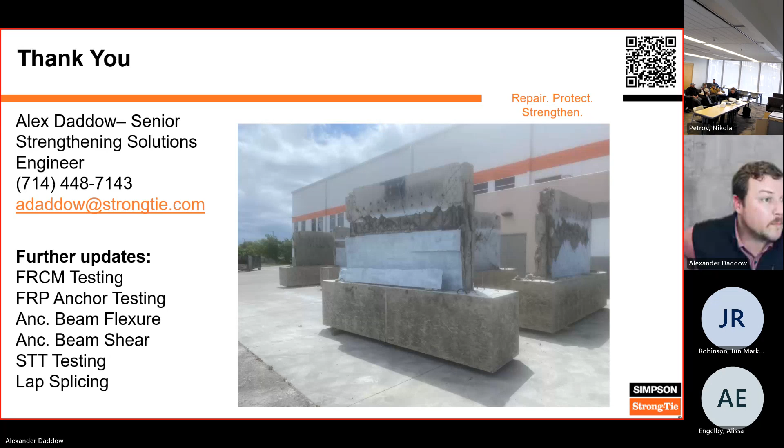Very low pass rate on the first round of the SE exam using computer-based testing, less than 20%. Sounds like it's partially due to conditions at the test centers. AELS is meeting with other state boards to talk about improvements.

It's all electronic, Adobe PDFs screwing up all the time. Imagine taking a test and your PDF is crashing on you. The SE test was one where a lot of it was by paper, and they had the afternoon session all by hand.

I read the letter from Illinois. I don't agree with every point in there, but I think they probably should go back to a paper-based test, or at least let you bring your own scratch paper, because you have your recap, your notes, everything on screen. And then I think not all the questions were actual questions - there were sample questions or something like that, so it was like, why are you wasting your time dealing with questions that don't count toward the exam?

But you have an hour longer test versus only 4 hours, so that was accounted for. The actual test is also 21 and a half hours now, I think it's 4 or 5 sessions, so it's not a 15-hour exam anymore - it's like a 21-hour exam. They added more questions to help with the case studies. It seemed like in the first round they were just testing key things. It's an expensive exam, and you also have to take PTO off since it's 4 days now. Looking at a 15% pass rate for the depth exams is pretty off-putting.